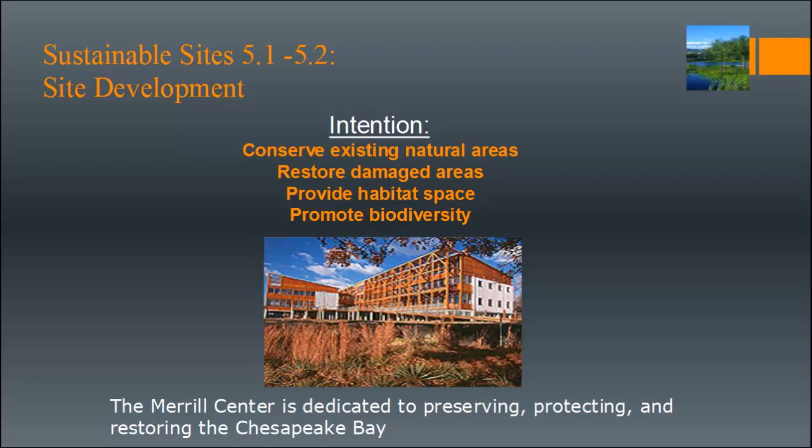SS Credit 5.1, Site Development, Protect and Restore Habitat, has 1 point available for new construction, schools, and core and shell. There are 2 options to achieve this credit. Option 1, Greenfield Sites. Protect by limiting site disturbance beyond 40 feet of building perimeter, 25 feet of constructed areas with permeable surfaces, 15 feet of primary roadway curbs and utility trenches, 10 feet of walkways, patios, surface parking, and 10 feet for utilities less than 12 inches in diameter.

In LEED version 4, draft 4, they replace setback requirements with preservation standards, and soil requirements include disturbed, compacted soils. If trying to achieve this credit, it's important for a contractor to delineate where site construction waste and recycling is going to be stored in order to maintain areas that are going to be left in their native indigenous way. Pre-planning is important to low-impact design and construction.

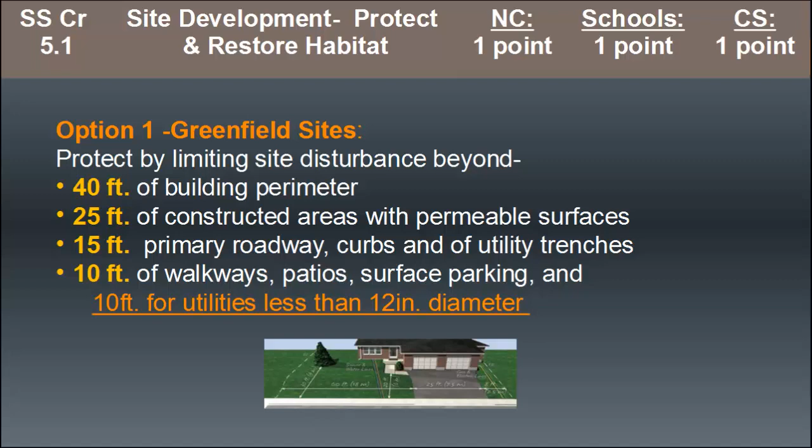SS Credit 5.1 Option 2 is previously developed sites, which means keep 50% of the site green, excluding the building footprint. There's an innovation design credit available for 75% of the space being green space. Or you can calculate this with 20% of the total site, and that would be including the building footprint. Innovation design is available if 30% of the site is left open, including the building footprint.

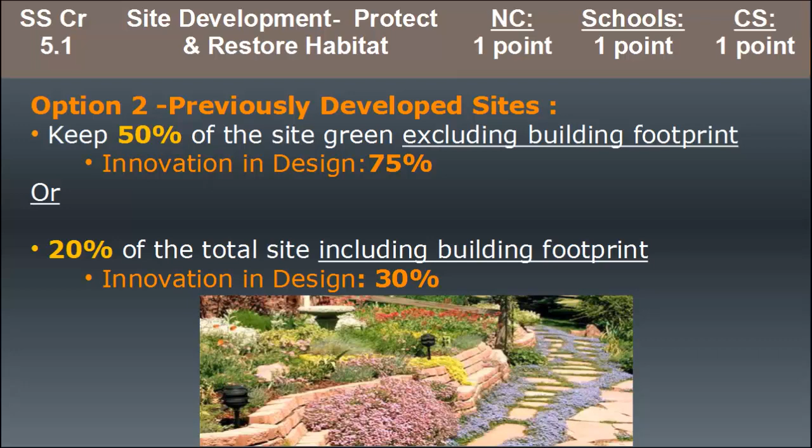This is an example of where LEED version 4, draft 4, has proposed just upping the ante on existing credit requirements, where 30% would become the credit requirement, not an innovation design point. To achieve this credit, you can include a green roof if the project earns SS Credit 2, Development Density and Community Connectivity, and if the plants are native or adapted to provide habitat and promote biodiversity. Turf grass roofs would not be accepted.

It's important to practice integrated design for these types of sustainable design and construction projects, including landscape architects, roofers, people specialized in horticulture, and the owner, to make sure that all goals are met to help the life of the roof through a green roof, not just achieving this credit, but a life cycle cost analysis of how it could actually improve the building over time.

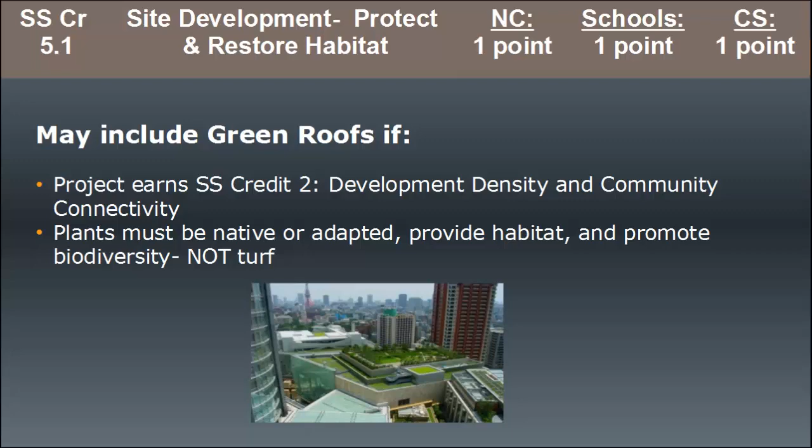Sustainable Sites Credit 5.2, Maximize Open Space, the second credit related to site development. There are 3 options. Option 1 is if there is a local code for open space, then the open space should exceed local code by 25%. Option 2, there is no code, which could be campuses or military bases, where open space is to be the same size as the building footprint to meet the credit criteria. Or for option 3, if there's a local code but 0 open space requirement, then open space should be 20% of site area. LEED version 4, draft 4 provides opportunities for social interaction, passive recreation, and physical activities.

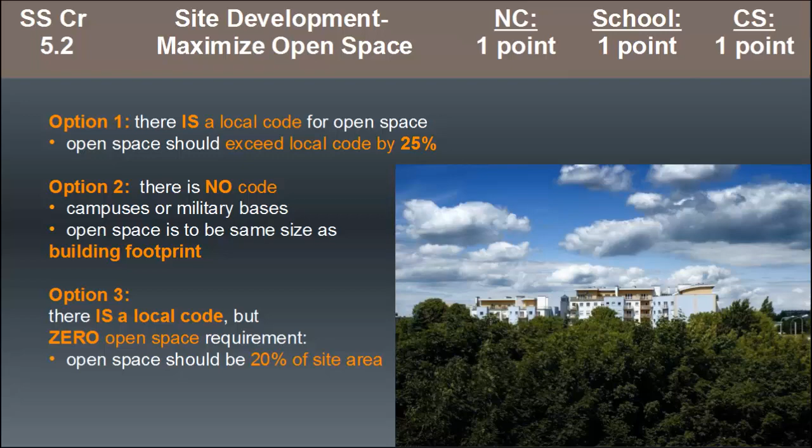Also, the green roof option can only be counted if it's physically accessible by the building users. There are many roofs you could see in Portland from other buildings, but you never gain access to when you're actually in those buildings. I think this would be a great addition. There's also talk about creating activities in buildings where people could actually maybe even jog around on their lunch break on top of a building in some sort of track.

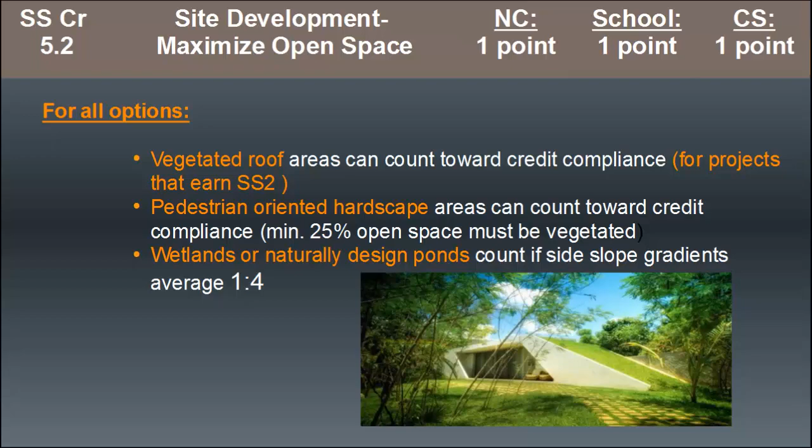For all options, once again, a vegetated roof can count towards the credit if SS Credit 2, Development Density and Community Connectivity, is achieved. Another part of the site that can be included is pedestrian-oriented hardscape, but that's only if it meets a minimum 25% open space that's vegetated. And wetlands can also be considered open space. This could also include naturally designed ponds, if the side slope gradient is an average of 1 to 4; any more than that, it'd be like a crater.

Examples of urban open space could include pocket parks, accessible roof decks, plazas, and courtyards as well. This also has synergy with stormwater management. More examples of green roofs integrated with design.

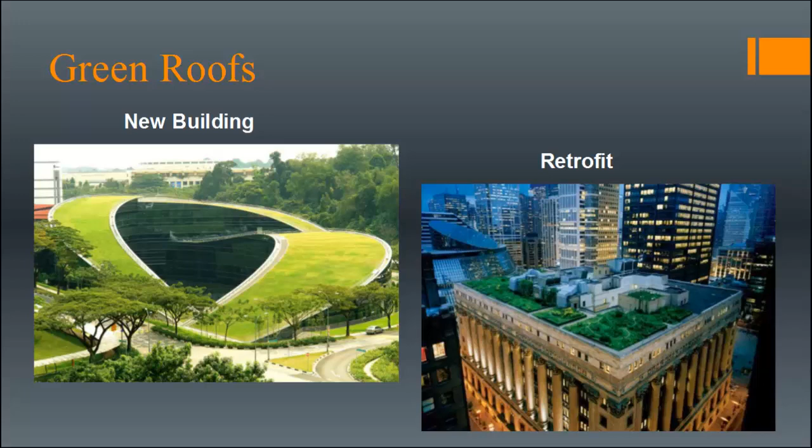It's important to consider all layers of a green roof and all the different options of how you can apply a green roof. For existing buildings, a modular system may be preferred for ease of installation, possibly even being able to go up on an elevator to avoid crane costs.

And also make sure that there are multiple layers of protection for root barrier and protecting the roof. This also adds to the performance of the roof for energy efficiency, which has synergy with Energy and Atmosphere Credit 1, Optimizing Energy Performance. The open space credits we just went over. Stormwater management through evapotranspiration from the green roof, and also reduction in heat island effect by adding more green space.

The various layers could include vegetation, some sort of growing medium, a drainage area, membrane, and of course the structural support for the roof, which may need to be increased for the weight of the green roof, depending on what's being grown, the depth of the soil, therefore the weight of the green roof. Once again, integrated design facilitates this process in making good decisions that are going to help the life of the building.

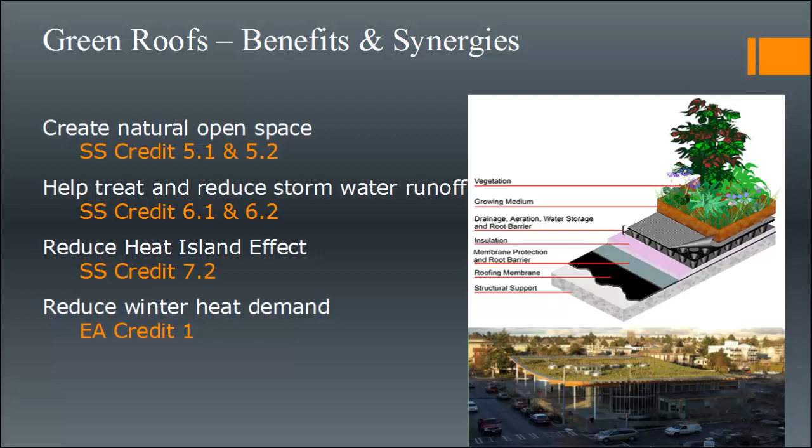There are incentives for green roofs in many states. Oregon, for example, offers $5 per square foot for an eco roof. It's important to check with your local jurisdiction to see if there are any incentives available.

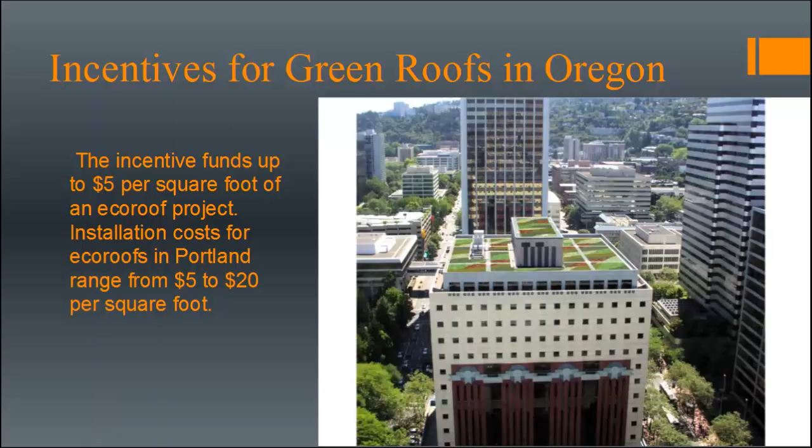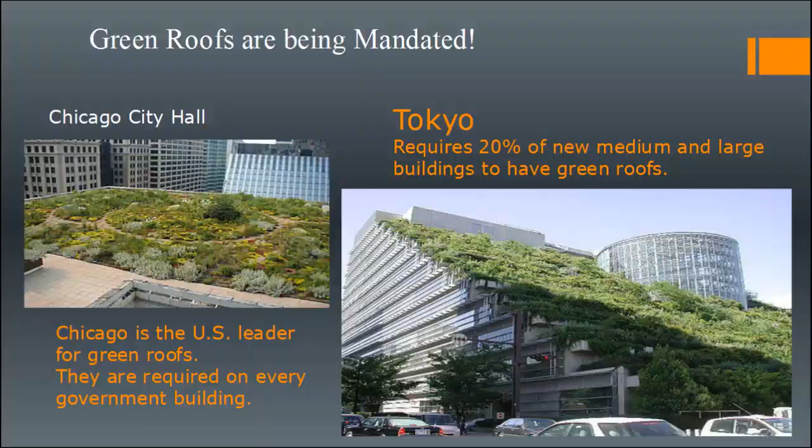Some areas are actually mandating green roofs. In Chicago, for example, every government building has a green roof. Tokyo is growing their requirements as well. It's this massive scale adoption that's going to make the impact necessary to reduce our impact on our climate.

An example of a green roof is on the California Academy of Sciences rooftop in San Francisco. It's substantial in size. It covers 400,000 square feet. And it features an undulating 2.5 acre living roof. Within that, there are porthole-like skylights. This helps with energy efficiency within the building as well to reduce the amount that electric lighting is used.

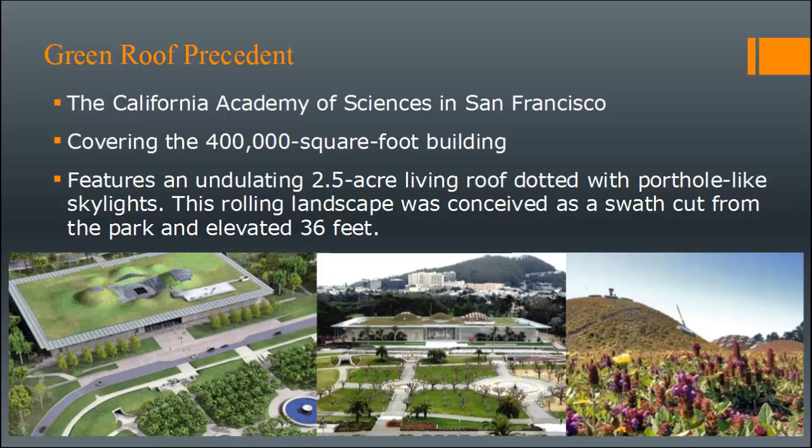And this rolling landscape emulates the park that existed before the building, lowering the impact of the building on that ecosystem. Sustainable Sites Credit 6.1 and 6.2 both relate to stormwater management and design. Good stormwater design mimics natural hydrology. Too often we see water puddling and overly exhausting our municipal resources and systems.

LEED version 4, draft 4, now has a credit titled Rainwater Management proposed that would combine quantity and quality control, which are the two separate credits in version 3 for the stormwater section, and incorporates more site-specific criteria for frequent low-intensity events and additional zero lot line options for urban developments.

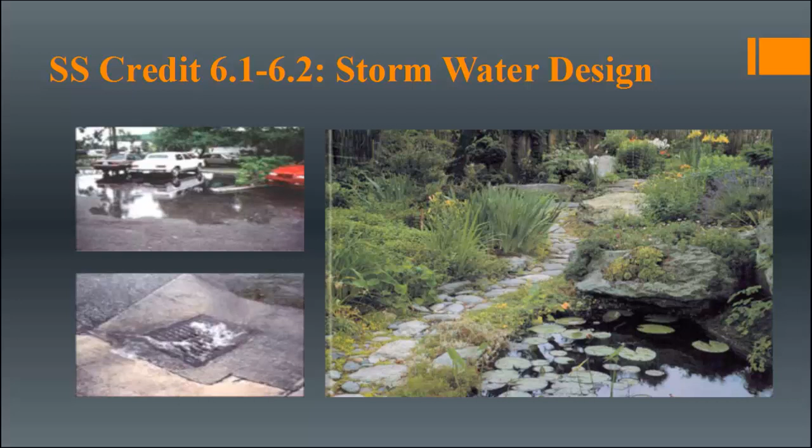Developments have a large impact on stormwater management. On natural ground cover, you get an average of 25% deep infiltration depending on your location and soil type, and 25% shallow infiltration, so 50% total infiltration. Only 10% of rainwater becomes stormwater runoff, and 40% is evapotranspiration from vegetation. This helps our natural ecosystem,

as opposed to development that has 75 to 100% impervious surface, like many areas, where there's only 5% deep infiltration, 10% shallow infiltration, which is less than half of what you see in the natural ground cover. 55% results in stormwater runoff. There's only 30% evapotranspiration. So gradually, the more impervious surface you have, the less infiltration happens that feeds our natural aquifers and groundwater table.

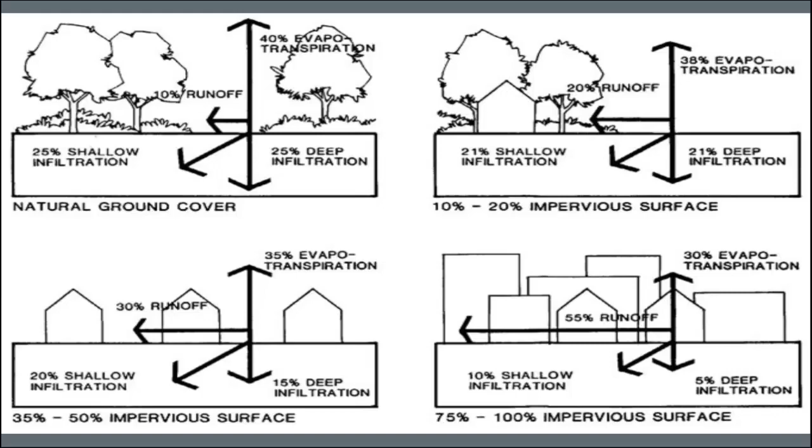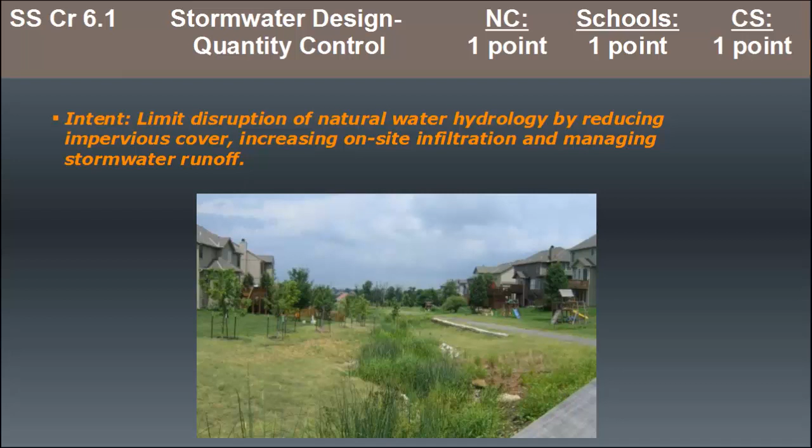The U.S. is going to see many water shortages over the next 5 years, which I think is going to draw more attention to how we use our potable water and how we manage our stormwater. And LEED version 4 is taking that into consideration during this comment review period. SS Credit 6.1, Stormwater Design, is for quantity control. The intent is to limit disruption of natural water hydrology by reducing impervious cover, increasing on-site infiltration, and managing stormwater runoff.

Option 1 is for largely undeveloped sites. Existing imperviousness is less than or equal to 50% in this case. And you must implement a stormwater management plan for the 1 and 2 year 24-hour design storms, where the post-development peak discharge rate and quantity is equal or less than the pre-development peak discharge rate and quantity.

Stormwater is a major source of pollution for all types of water bodies in the United States, including the river I grew up on. Increased stormwater runoff can overload pipes and sewers and damage water quality. Or in our case, there was combined stormwater and sewer, and they would overflow into the river, which is unhealthy for both humans and animals in the ecosystem in our rivers.

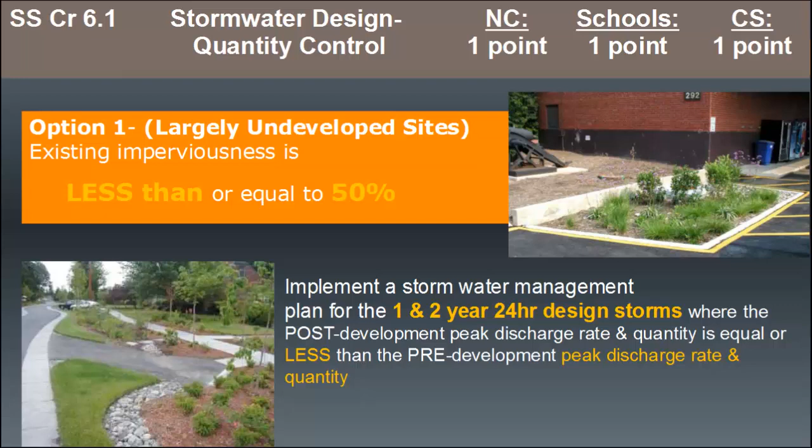Roads and parking lots produce stormwater runoff that contains sediment and other contaminants such as atmospheric deposition, pesticides, fertilizers, vehicle fluid leaks, and mechanical equipment waste. This can all be prevented with better stormwater management and low-impact design. Just showing the importance of what these LEED credits are actually addressing. They're much more than just a checklist.

Option 1, continued. The other option is to implement a plan that protects receiving stream channels from excessive erosion via a stream channel protection strategy. You must describe site conditions, measures taken, and controls implemented.

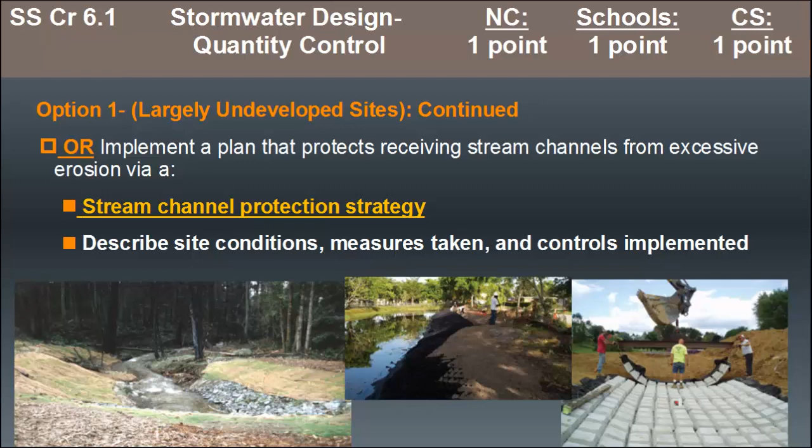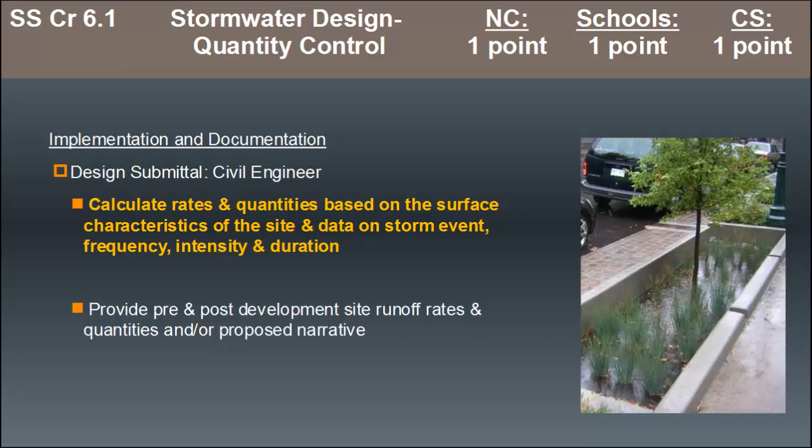Implementation and documentation would include a civil engineer in the design submittal, where they would need to calculate rates and quantities based on the surface characteristics of the site and data on storm event frequency, intensity, and duration. They must provide pre- and post-development site runoff rates and quantities proposed in a narrative.

Option 2 is for largely developed sites, where existing imperviousness is more than 50%. Must implement a stormwater management plan for the 2-year, 24-hour design storm, and it must result in a 25% decrease in the volume of stormwater. There's an innovation design credit available by documenting a comprehensive approach to capture and treat stormwater runoff above and beyond the credit requirements.

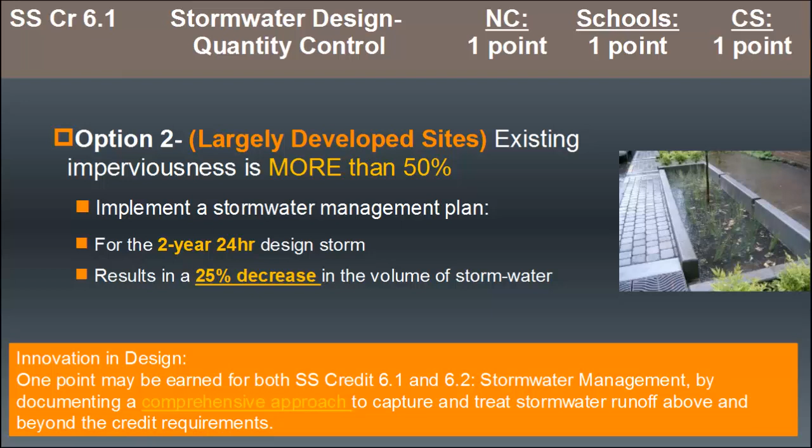To estimate runoff rates and volumes, there is a rational method that is often used. You can find resources at the U.S. Natural Resource Conservation Service website, which is used typically to calculate runoff quantities.

Option 2, we see a letter template for LEED Online. This is just a sample of what's included in the letter templates that are uploaded for credit compliance verification. See pre-development site runoff rate in cubic feet per second, pre-development site runoff quantity, and then post-development site runoff rate and post-development site runoff quantity. And because LEED Online now uses Adobe LiveCycle, this will give you the percent reduction in post-development site runoff rate and the percent reduction in post-development site runoff quantity.

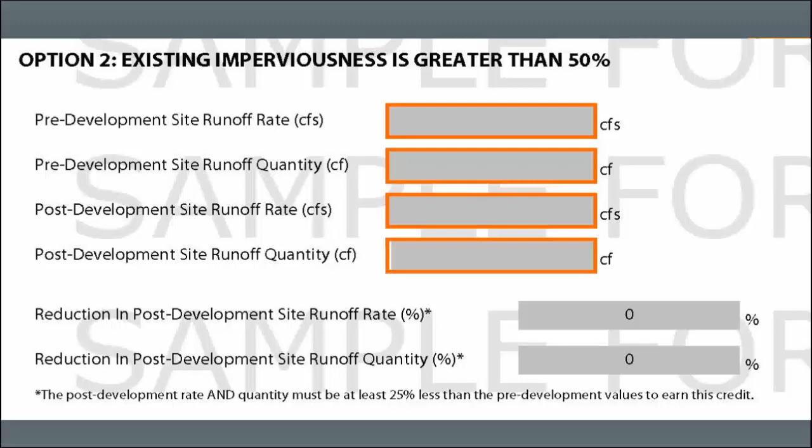Strategies include rainwater harvesting, which means you're reusing the stormwater for non-potable water purposes, such as flushing urinals and toilets. Also custodial applications, cleaning sites, cars, or the building. And also building equipment. This could be makeup water for your HVAC equipment. Underground parking, which also has a synergy with heat island effect and open space. Cluster development, also synergy with open space, similar to the strategy to limit building footprint, add more density.

Pervious paving, you can see water infiltrating through the porous paving. And green roofs, which, as we discussed, have many synergies within the LEED rating system that have a positive effect on the sustainable design of a development, including reducing stormwater runoff, reducing heat island effect, increasing open space, especially with native or adapted species, and also helping with optimizing energy performance through insulating the roof, if it is done correctly.

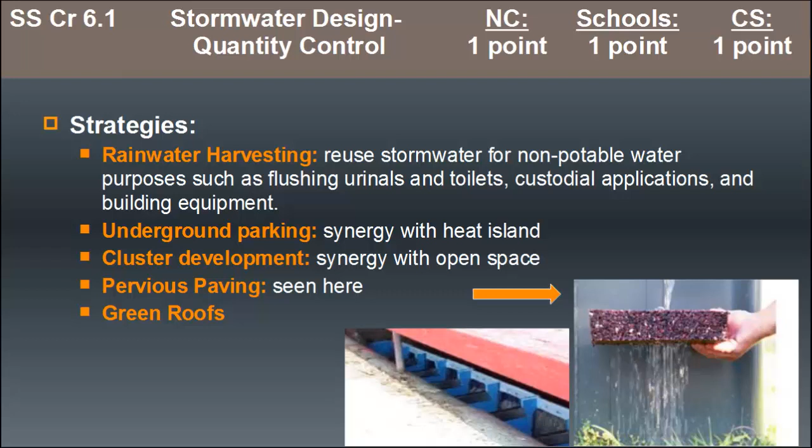Implementation and design is critical. Just putting turf, grass on top of a roof is not going to afford all these benefits. Once again, an integrated process with multiple team members is critical in making the best decision on what type of green roof should be applied to your project.

Other methods for minimizing the impact of parking could include a grass paved system for parking aisles and a gravel paved system for driving aisles. This could have other benefits, including economic benefits in reducing the need for extensive drainage systems, manholes, catch basins, and oil and gas separators, depending on your jurisdiction's codes and requirements.

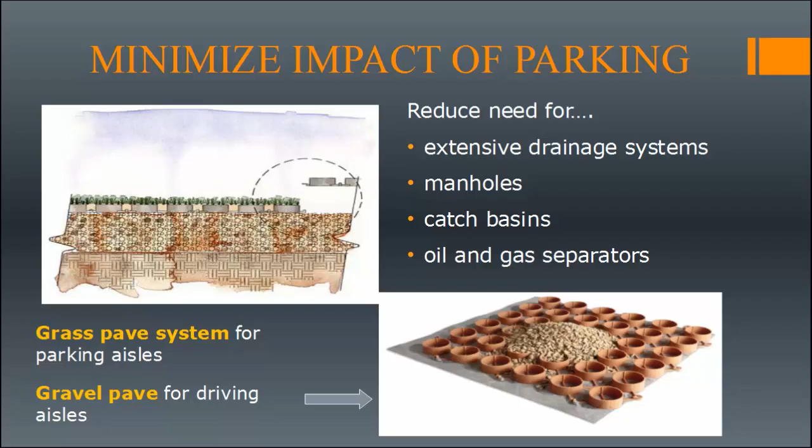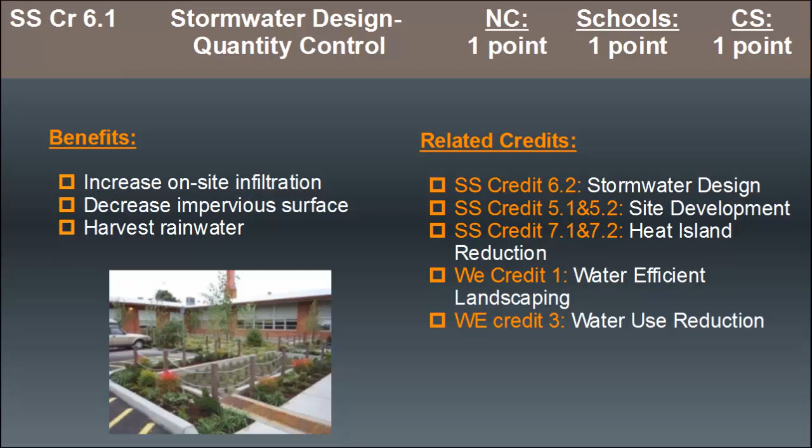So related credits, SS Credit 6.2 Stormwater Design, 5.1, 5.2 Site Development, 7.1, 7.2 Heat Island Reduction, Water Efficiency Credit 1, Water Efficient Landscaping. The synergy could come from rainwater harvesting. Water Efficiency Credit 3, Water Use Reduction. So we could use rainwater harvesting for both irrigation and for flushing toilets. Benefits is increasing on-site infiltration, decreasing impervious surfaces, and the potential for harvesting rainwater.